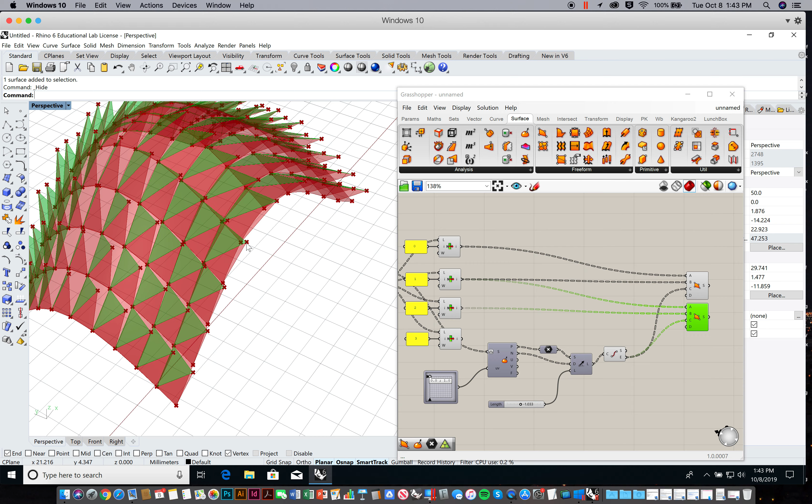As promised in the last video, in this video we're going to take each of these components and join things together as much as we can, so that then we can efficiently unroll or unfold all of these flat and planar on the XY plane, arrange them in a grid that makes sense, and then assign each one a label that can be inscribed with the laser cutter.

Okay, so here we go. Here's our starting point: 100 triangles, 100 triangles. So one of the things I'm going to do is figure out how to join things. Oh, B Rep join, there we go.

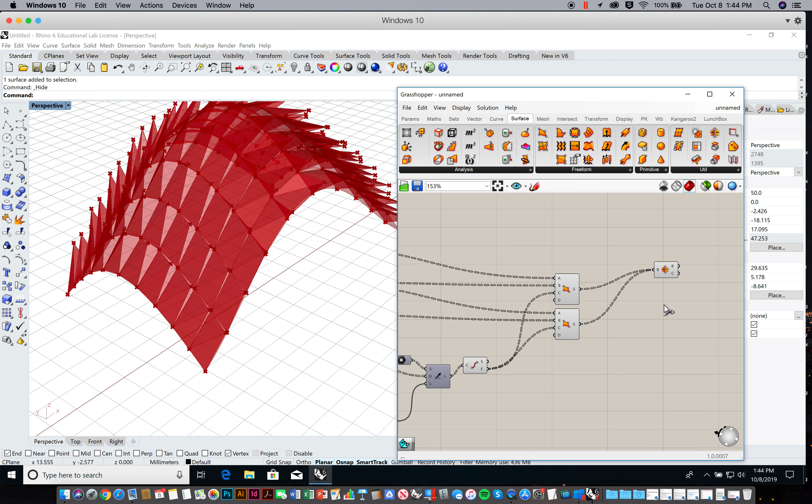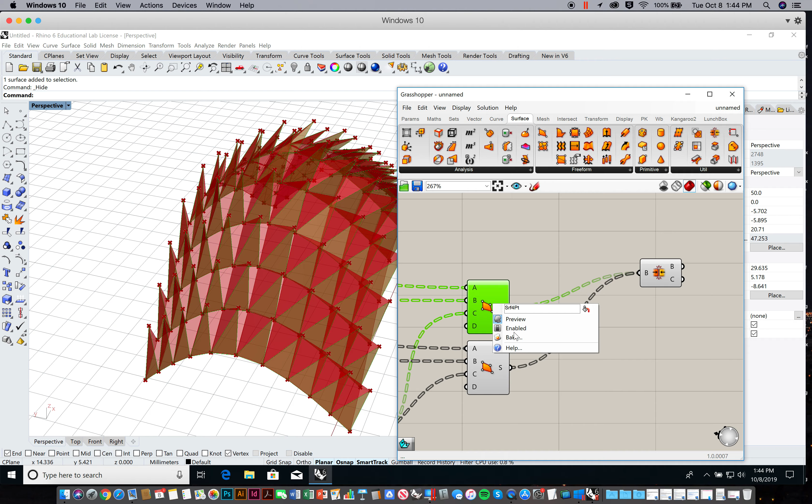Right, Surface, Utilities, B Rep Join joins a number of B Reps together. Again, B Reps is just a fancy word for poly surfaces. I'll go ahead and plug these in. So I plugged in 100, 100, 200 things. And if I hold my cursor over it, now I have just 100 things, right? Because each of these triangles share an edge with the other, so this is going to be joined together as an open poly surface. I'll turn the previews off so you can see a little better. So this is now joined with this for each of these cells. That's handy.

Now, the other thing I promised is that we're going to figure out a way to unroll these. We all know that there's an unroll command in Rhino. There is no unroll command in Grasshopper out of the box. However, there is a plugin for Grasshopper.

It's called Lunchbox Tools. It's right here. And inside Lunchbox Tools, if you have that installed, if you go to Utilities, there's an Unroll B Rep. Yay, that's exactly what we're going for.

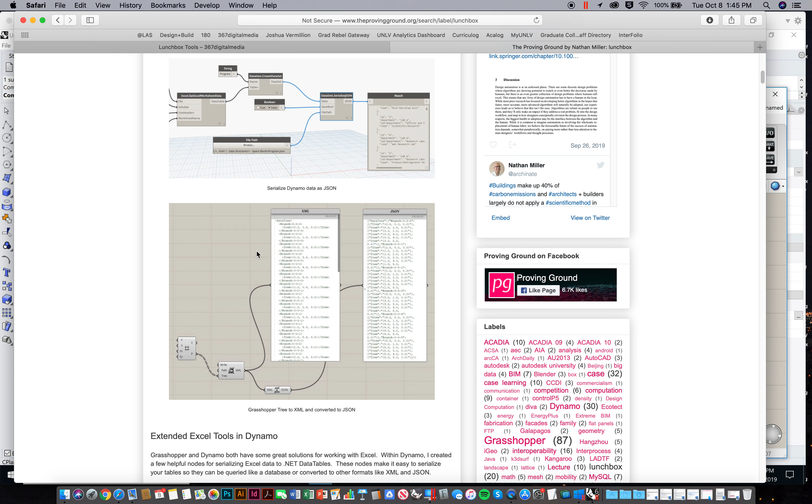Okay, but once you do that, install and then restart Rhino, you'll have a new tab, Lunchbox Tools. Oops, I just placed something accidentally. Now that'll give us a chance to use the Unroll B Rep command. So we're going to look at this.

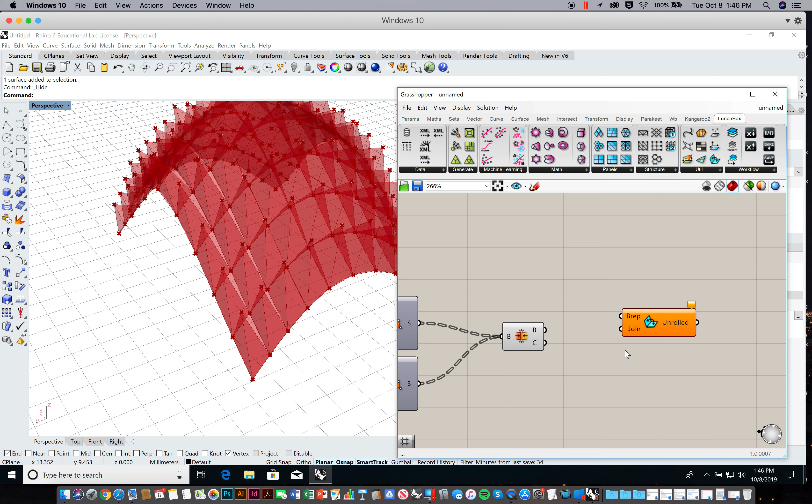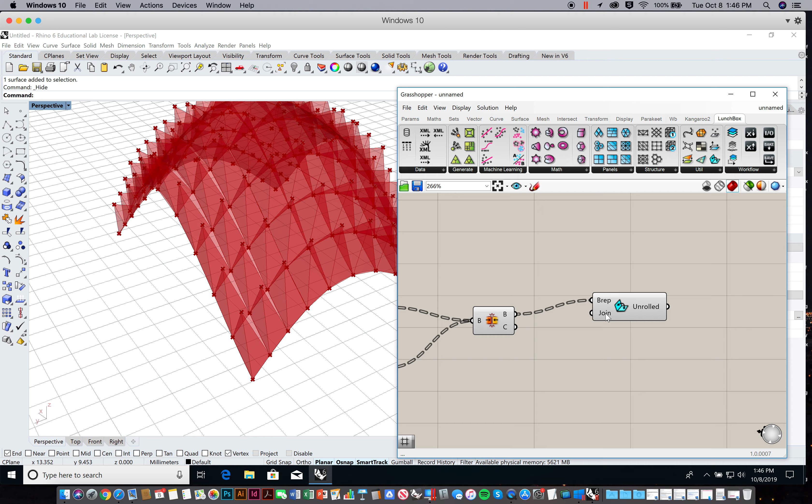The B Reps to join is one of the first inputs, and then another input is... let's see if I can get my cursor to work a little better. Why won't it run? My mouse must be sticking a bit here. Stupid magic mouse.

Here, let me see here. Now, I've already plugged these in, and you can see all of them have been unrolled at the 0,0 point. But I'm trying to figure out what it's giving me, and for some reason the right click and left click is a little stuck on my mouse, which is annoying. Let me just unplug my mouse and do it without it.

There we go. So now we have 200 surfaces again. What we need to do is make sure that we're joining—we keep everything joined—so go ahead and hit true. No, this thing's just being a little laggy. I think it's because there's 200 unrolled surfaces maybe. I'm not sure why it's taking its time trying to figure this out.

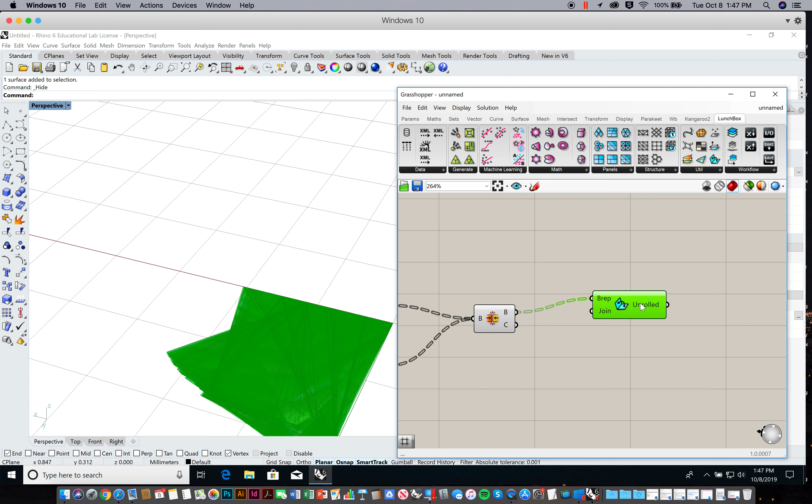Okay, so now we're back to 100 surfaces. So what that tells me is that as we unroll these, it's not exploding each individual face of each poly surface. We started with 200 surfaces and joined them together in pairs, so we only had 100 poly surfaces. Then when this was set to false, it exploded those back into 2 surfaces each. We kept it as true, and that kept things joined, and that worked out really well.

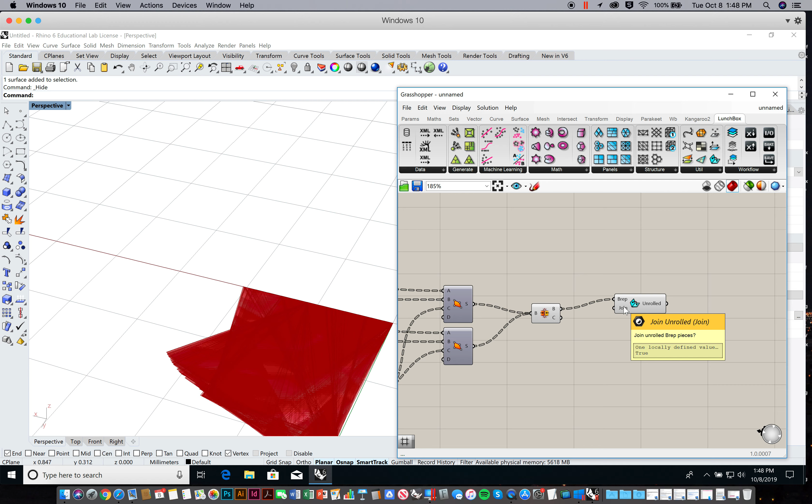All right, now what we want to do is maybe distribute these along a grid, since they're all just laid on top of each other over that 0,0 point. That's not very useful for us.

So let's go ahead and place each one on a grid. What we're going to do is use the move command. I'm going to go to Transform, Euclidean, and Move. We need the geometry to move, and then the translation vector, the position to move it to.

So I can plug this in, and now I need 100 translation vectors, or at least 100 locations to move each of these to. So what I'm going to do is create a grid of 100 points. We're kind of pros at this by now, aren't we?

Now, I don't know if you guys have noticed this in the vector tab, but there is a grid tool. So we can just say base plane for grid XY, size of grid cells 1, number of grid cells.

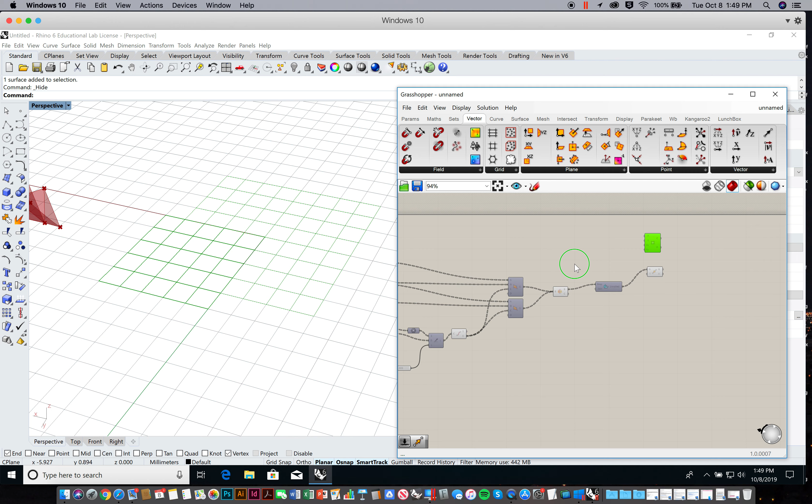So the number of grid cells is going to be all the way back here. Let me just pull this over here so we can see a little better. We're dividing the surface by 10, and that's determining 10 by 10.

So let me go ahead and use that. I'll actually use 10 here and plug that in for this one and this one, and that way we have 10 for these as well.

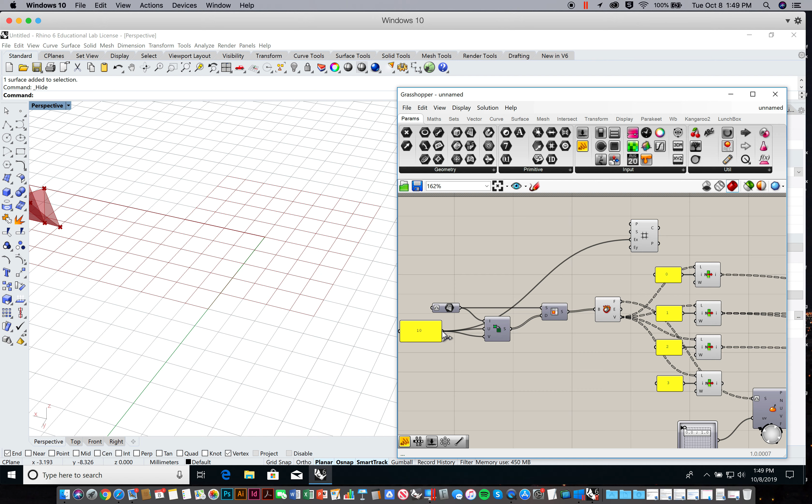What that'll allow us to do is if we ever change this number for the number of divisions in U and in V, then it'll also automatically change here for the number of grid cells that we have.

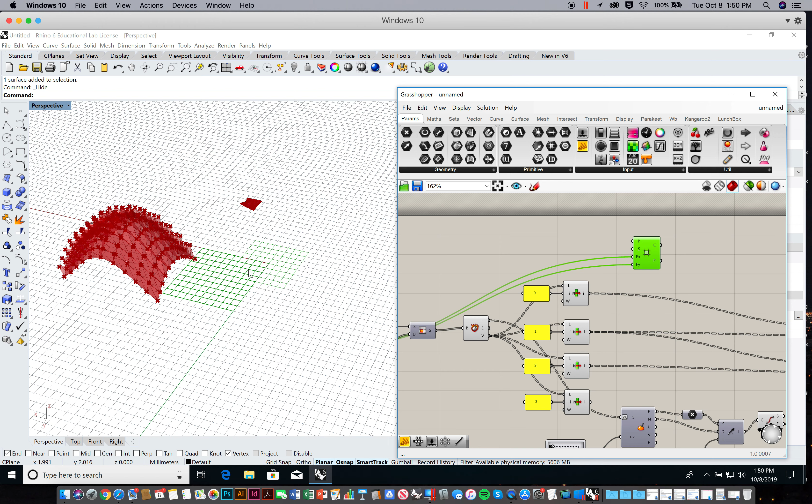You can see them here, and here are the points at the grid corners. Oh, interestingly, it starts at 0 and 10. So the points we have—we have 10 cells, right? But that means we have 11 points.

I just want 10 points. Aha, that's interesting, isn't it? So one thing we could do is always take this number and subtract 1 from it before we plug it in here. Let me try that first.

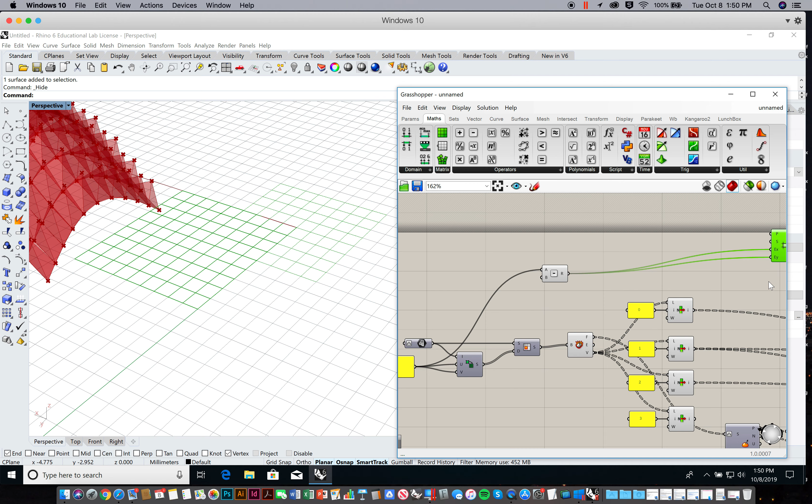I'll do a little subtraction widget. Plug this in for A, subtract 1 from it—I'll right-click on the B, set data item, throw in a 1 there. Now I'll plug this in. Now when I look at the points, there's 100 points, which is perfect because we have 100 items.

Also the spacing, we might want to change that. So I'll go ahead and put in a little number slider here and change the min-max to something bigger. Now let me go ahead and move this over to where we need it, because we're going to use these points as the translation vectors for each of these.

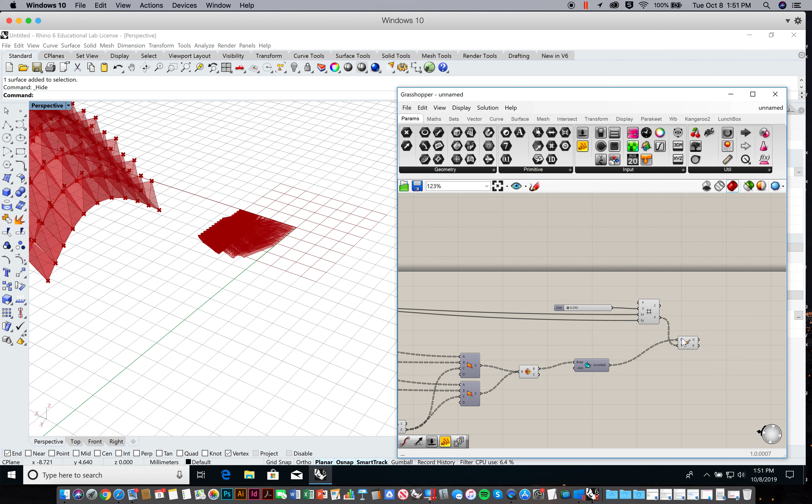One last thing I'm going to do is go ahead and disconnect these for a minute. Disconnect, right-click and disconnect.

I'm going to say flatten everything that's in here and flatten everything that's in here. So I don't want data trees anymore—I want to flatten these out into a list. Here's the locations, here are these.

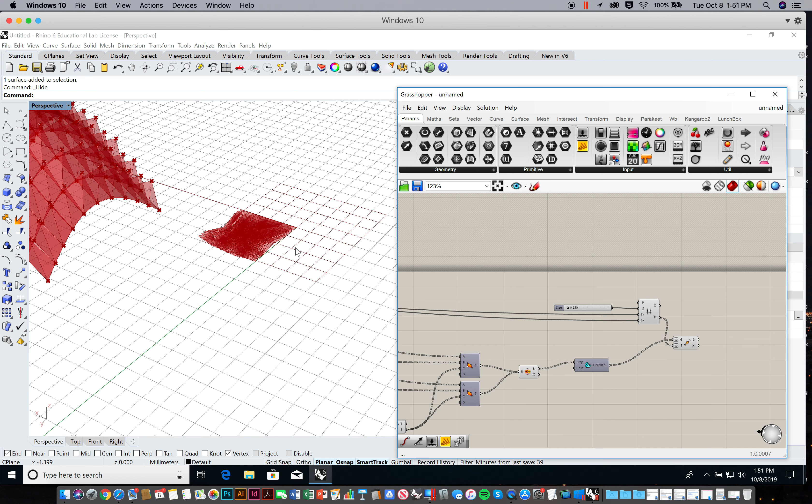Let's go ahead and spread these out a little bit. By changing the size of our grid cell, we change the spacing between each of these. All right, so there's triangle and triangle, right?

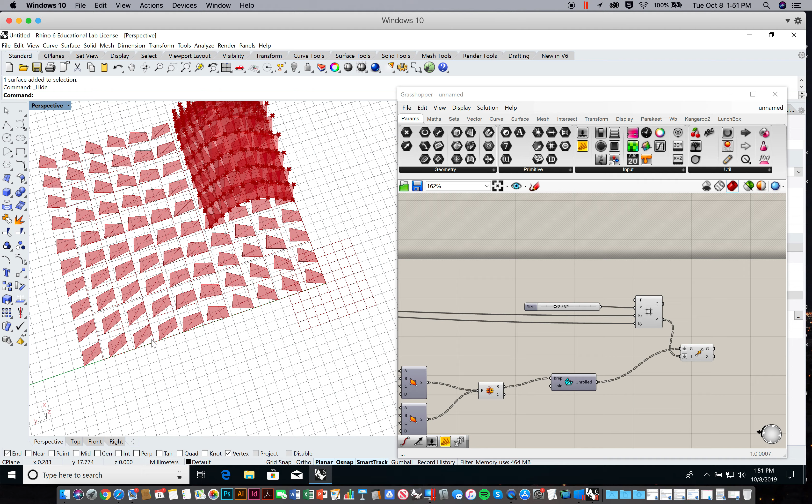We can see that there are 2 triangles that are joined together. Oh yeah, each one's different. Look at that—in fact, it's kind of a cool pattern, isn't it?

And so from here, we're really close to having some stuff to laser cut, aren't we? Right now what we have is our geometry as basically joined surfaces. The laser cutter doesn't like surfaces—what it likes are curves, vectors that it can follow, lines and curves.

So what we probably need to do is get the border or boundaries for each of these, and then also get this little line in between for the scores. Let me open up the example file: Shell, Surface, Responsive Surface with Trusses, Shell, Surface Classification, Surface Divide. Here we go.

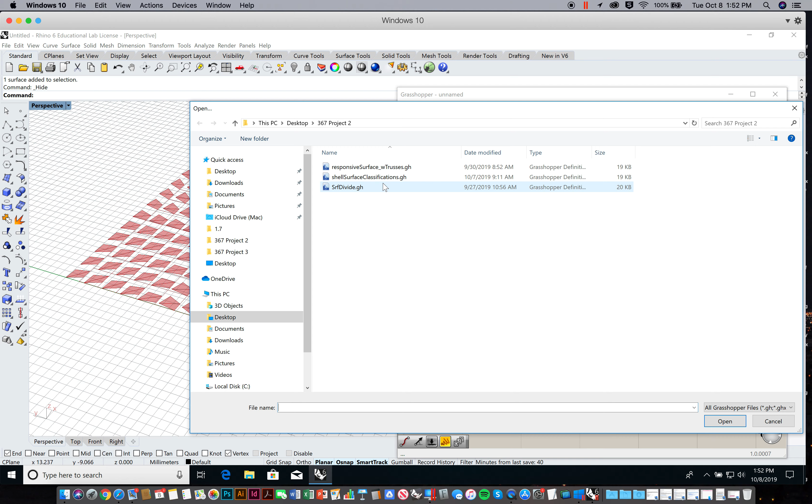Just remember what I used here for it: B-rep edges.

Oh, okay. B-rep edges. Interesting. I'll go back to this. So if I go to surface and I look at analysis, there should be something called B-rep edges. Now, here's the interesting thing. I can plug these in. Okay, so I'm plugging in a bunch of them. And look at this. I get the naked edge curves,

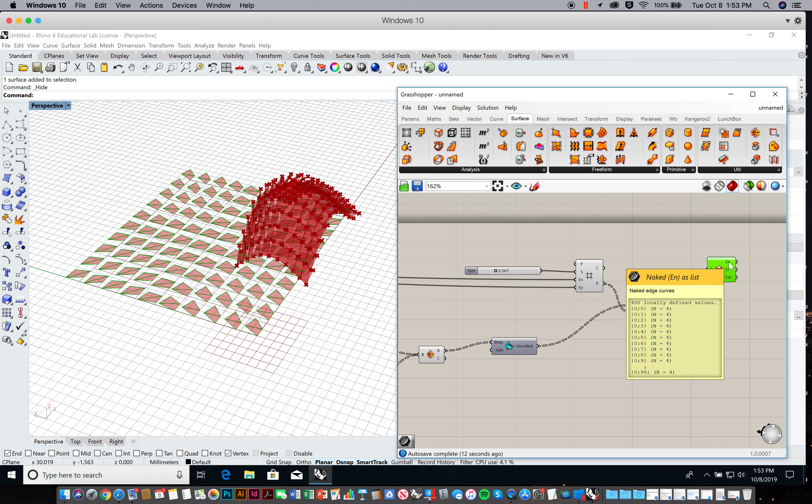which are, basically, a naked edge is an edge that has a surface on it, it's an edge of a surface, but then there's sort of air space afterwards. So this is not a naked edge. This is a shared edge, but this is a naked edge. All four of these are naked edges. They're outside edges, in other words. Then I have the interior edge curves.

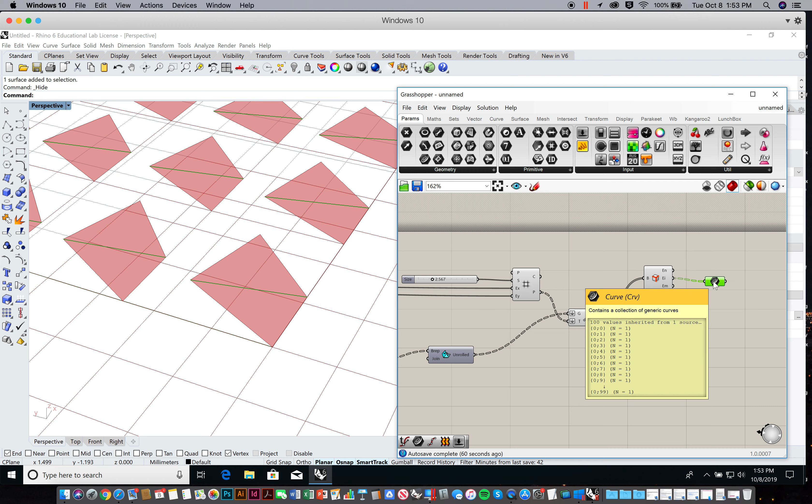Oh, isn't that convenient? Okay, and so I'll just pull these out as their own separate widgets so I can select them at a time. We have these. Maybe. And I'll go ahead and flatten them. Don't know why it's giving me a red error. Oh, it's because I pulled out a surface widget. These are curves. Boy. All right. There we are. So we have those green ones. And then we have these.

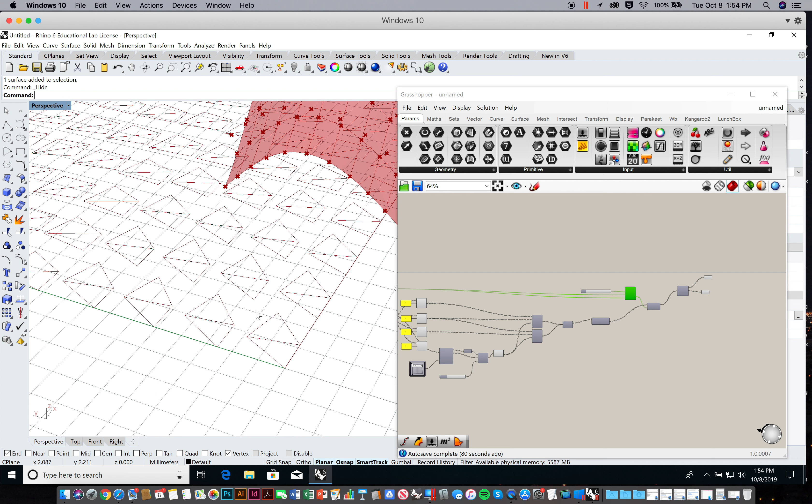Okay. Let me turn everything else off now. And let me also, seriously, phone. Let me turn off the grid on this XY plane here. I hate the grid. Why is it always on by default?

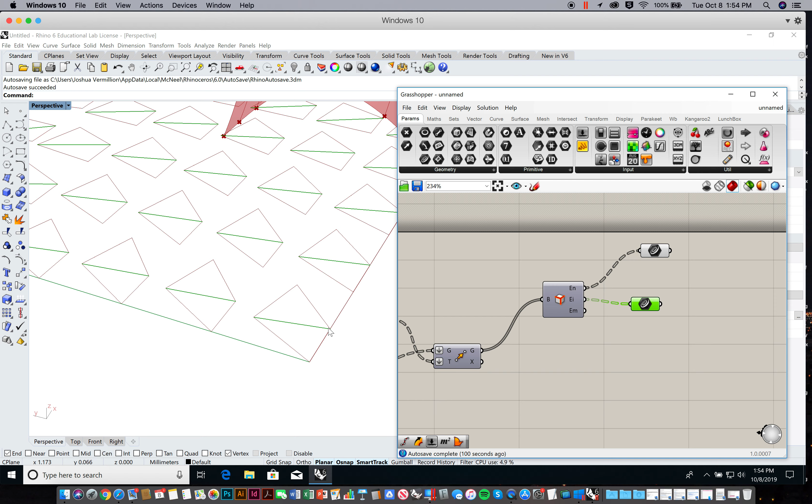Okay. And so here are our naked edge curves, i.e. our through cuts. And then here's our interior edge curve, which can be set to a different color on the laser cutter just to score. That way you score slightly through the material, then it can fold much easier. All right. Yay. And so let me think about one other thing I probably did here.

Oh, yeah, that's right. I made little text tags. So what we have to do is generate some text or some sort of way to label these, and then take that text and plug it into this text tag. And we also have to give each of these text tags a location along those surfaces. So just to let you know, that's where we're going with this.

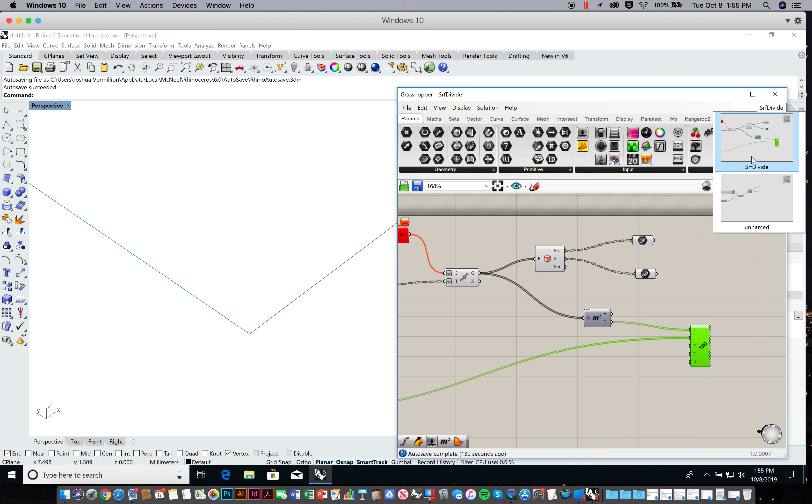One way I can do this is to think about it in terms of each row has a number and each column has a number, right? So each row could be 0, 1, 2, 3, 4, and each column could be 0, 1, 2, 3, 4. Or you could do the alphabet and then a number in one direction, like battleship. So it could be like B12 and C3 or whatever. But it's easier for me just to generate a list of numbers. And in fact, I have them right here.

I have a list of points. And so I have 0, 0, 0, 0, 0, 0. Let's see. Let me just do this. I'll flatten these points out. Oh, seriously. Emails are killing me today. Let me pull out these points. And I'll flatten them just so you can see. Yeah. Right. So I have a list of points.

Well, those aren't so good. Maybe I'll make one extra grid of points. Anyway, I'm just going to make a grid of points. And for the spacing, I'm just going to disconnect this. I'll set the spacing to 1. Really, all I want from the points is their x and y coordinates, and I just want to use those as numbers. So if you think about this for just a minute, I'll flatten this really quickly. Hopefully. There we are.

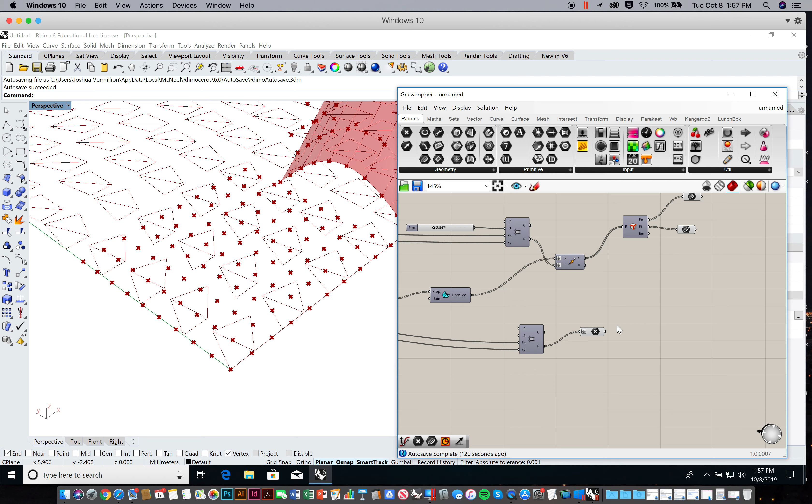Now I have a list of points, but if you look at their coordinates, I have 0,0, 0,1, 0,2, 0,3, 0,4, all the way to 0,9, and then 1,0, 1,1, 1,2, 1,3, 1,4, 1,5, all the way to 9,9. And so I can use that text to sort of differentiate each of these, right? So I can use those as text tags.

And so let me find, I'm going to double click and type in text. Maybe, here we go. All right, text tag, maybe it's this one. No, it probably isn't. Let me double check this. What did I use here? I used the 3D text tag. Okay, that's fair. I can never remember this. It's kind of annoying. Text. Now look for that pesky 3D text tag. There it is at the top.

Go ahead and undo that. Okay, and so for the actual location and orientation, right? But then I can also use these points as the text.

Okay, so location orientation of tag. Now we need to identify location in each of these surfaces. I'm thinking in this case what I'm going to do is just pick the centroid of each of these surfaces. I don't know of any other way to do it, to be honest. At least not offhand. I could try to hide one over here in one of these corners. Yeah, maybe I'll try that. We'll see.

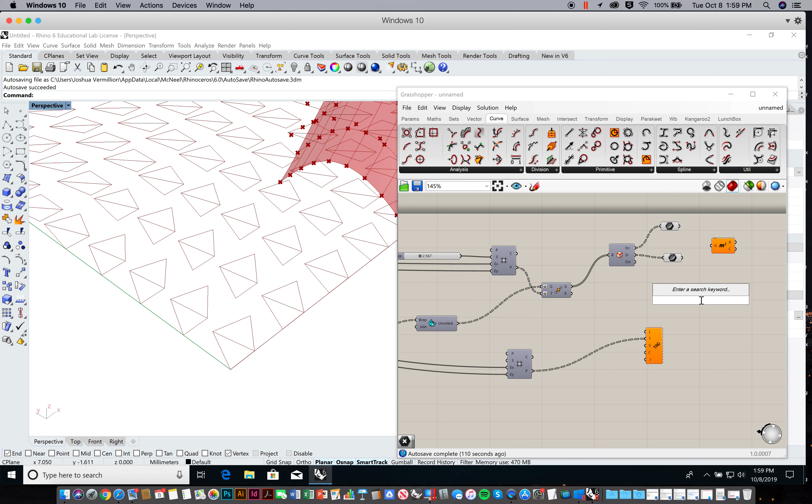So let's plug these in. Let's see if these are closed. Actually, it doesn't look like they're closed. We should probably join those together. Let's see if we can join curves together. Join curves. Maybe it'd be easier if I just typed it in. Join. Oh, there it was. Join curves. Yay. All right.

I'm going to join these bad boys together. What are the options? Join curves to join. Preserve direction. Okay, I'll just plug these in. Now I should have 100 with each. Yes, excellent. Now I can do this to get these areas. And what's interesting about the area widget is not only does it give you the area, it also gives you a centroid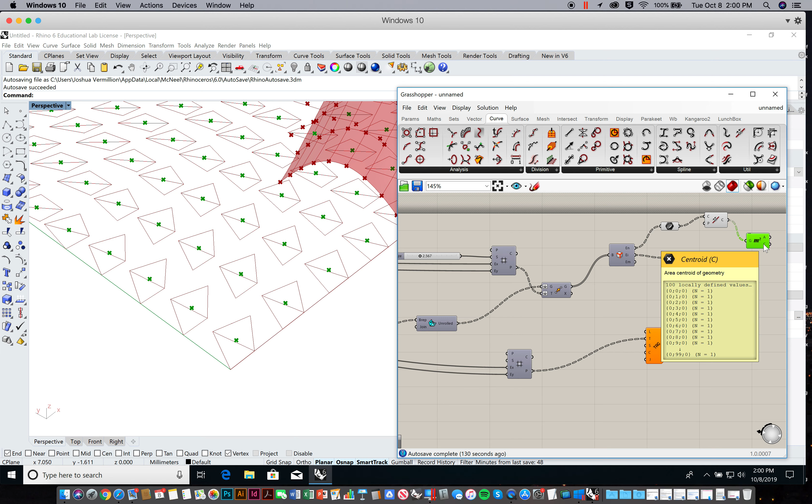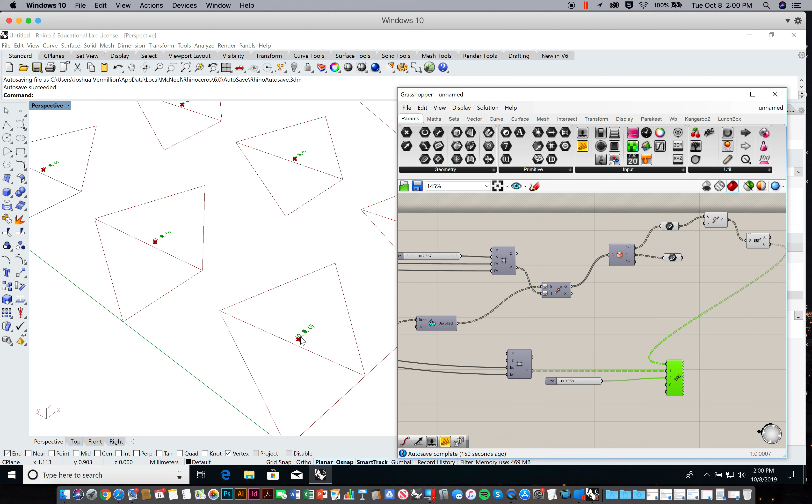of that area. Okay. And so you can see that we're placing this text, but the size of this is pathetic. Let's change the size of this. Plug that in. Lower this way down. I'm not sure what's happening here. Oh, I know. We're getting multiple things. And I think this has to do with our lists.

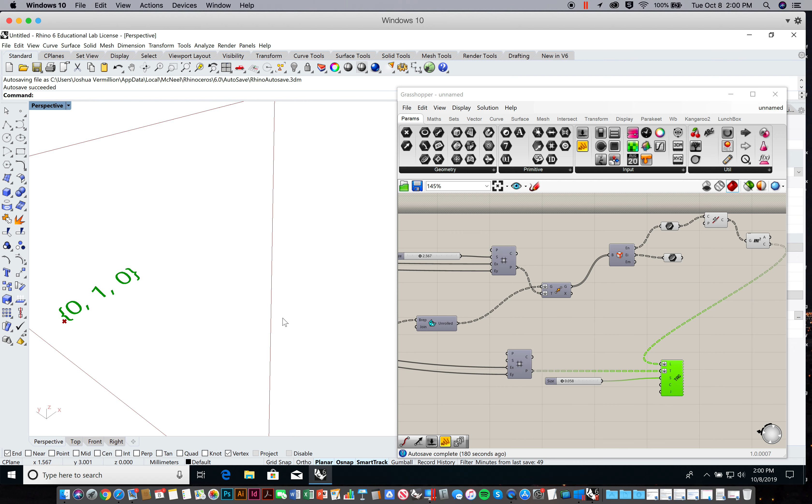So I'm going to right click and disable this for a moment. And I'm going to flatten everything that's popping in here. Flatten and flatten. Okay, now I'll enable it. Our data trees weren't matching up so well. So now we can also bake these in. Now these aren't curves yet. Once I bake these into Rhino, I can explode them, and then they turn into curves. I'll do that really quickly.

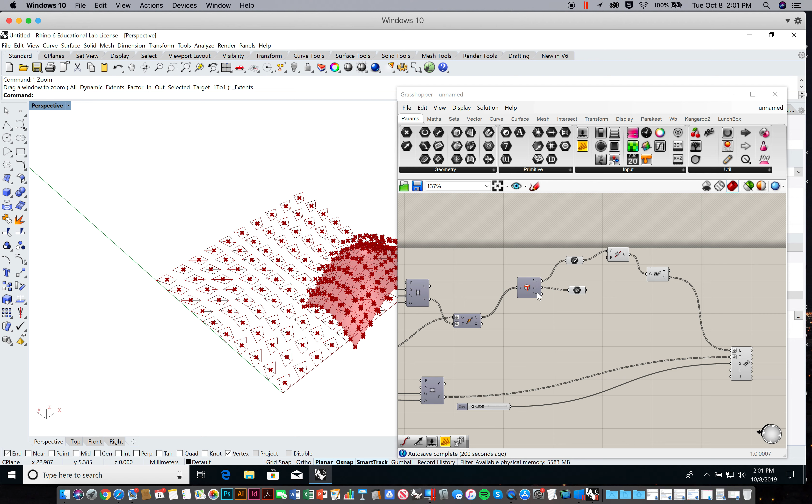So at this point, let me just zoom out here. I'm going to bake these curves. But first in Rhino I'm going to go to the layers and make some specific layers. So I'm going to say outlines, and I'll call these scoring. Oh, come on. I'll call these labels. And maybe I'll even try to spell it correctly this time. There we go. And so now I can select the correct ones.

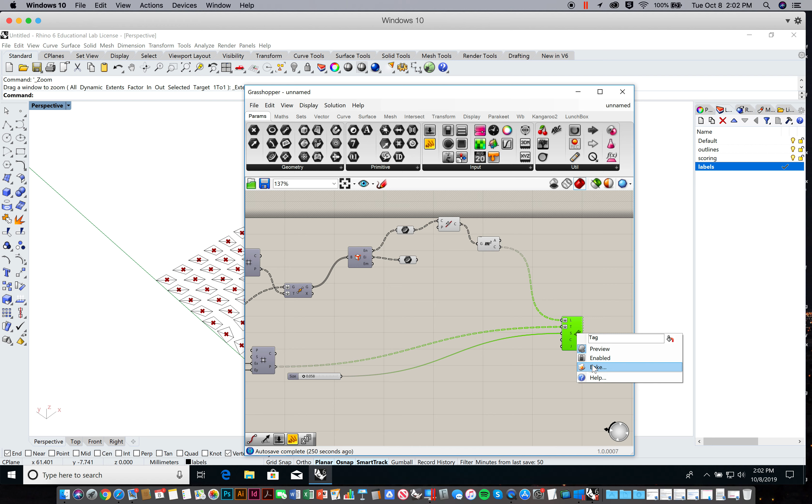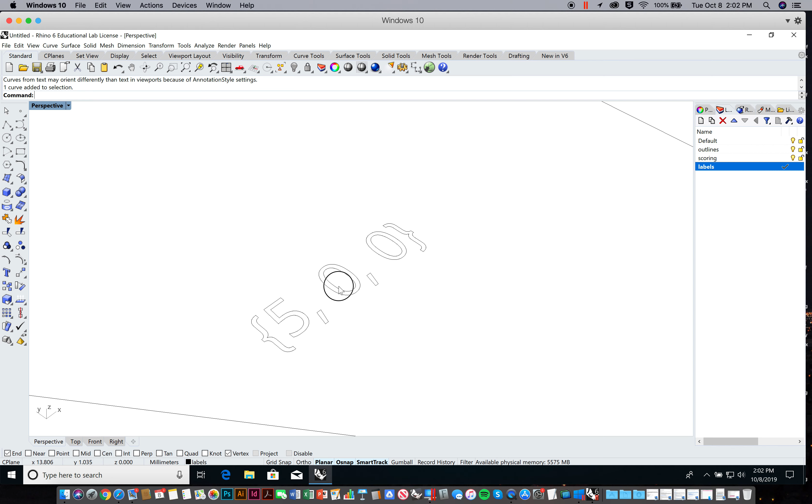I can select this and bake these into outlines. I can bake these into, let's see, scoring. And then I can bake these into the labels. I can turn off Grasshopper. I'm going to say select text, and it'll select all those text objects that I just baked in. I'm going to explode them. Now you can see that they're all curves. So that way these can just be quickly scored in, like inscribed.

All right. So that's a starting point. Like I said, we'll go over this again on Monday. But I wanted you guys to look at this. The more you can do leading up to fabricating a prototype, the better. Your assignment between now and Monday is to go through these videos and perform the steps one by one, but then to take this very simple component that I did and actually start to change it. These can be your starting point to modify into your own unique component that you're proposing for your own prototype.

Some of you might be getting this really quickly and just carry forward and even start to unroll things and label things. That's perfect. Some of you might be a little lost. You might have some ideas. Don't be afraid to sketch those ideas out or make a quick drawing of it. That's how these things usually work. You have to work things out before you develop it and execute it quickly and well in Grasshopper. Okay, so anyway, good luck.